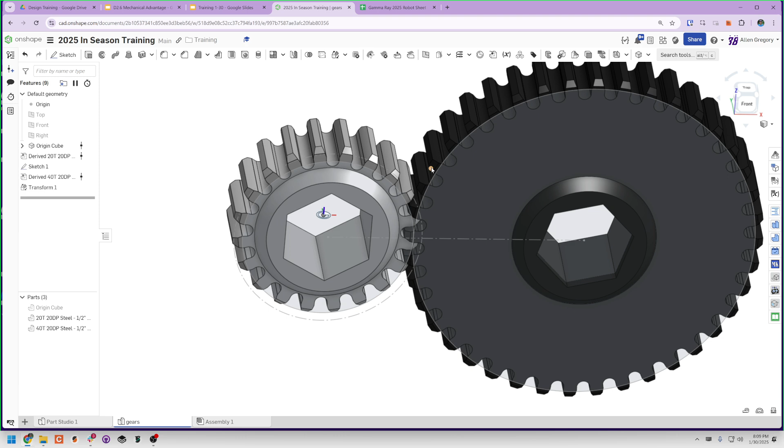COTS parts didn't exist for a long time, but at some point, the original kit chassis I think had metric gears, and then eventually they swapped over to 20 DP in one of those years, sometime in, I'm guessing, like 2006, 7, a long time ago. And then all of the gears sold in FRC for a while were just sold at this 20 DP size.

Every once in a while you'll see tinier teeth, so you'll see smaller teeth. Those are either some weird metric thing from a long time ago, or they're 32 DP. Those used to be really popular when we had really small motors, and we just needed to have a really small gear at the end of that motor and needed a little bit more teeth. And so we would use 32 DP gears to do that, but they were really easy to break, even in steel. You could break the teeth on those if you had them in any sort of heavy load application, so we don't use those.

And then the other ones we'll see sometimes are 10 DP gears, which basically the gear tooth at that point is twice as big as the ones for 20. And so the pitch is basically just how big the gear tooth is. And so for 10 DP, we use those on things that just need to be much larger. So last year we used it on the pivot.

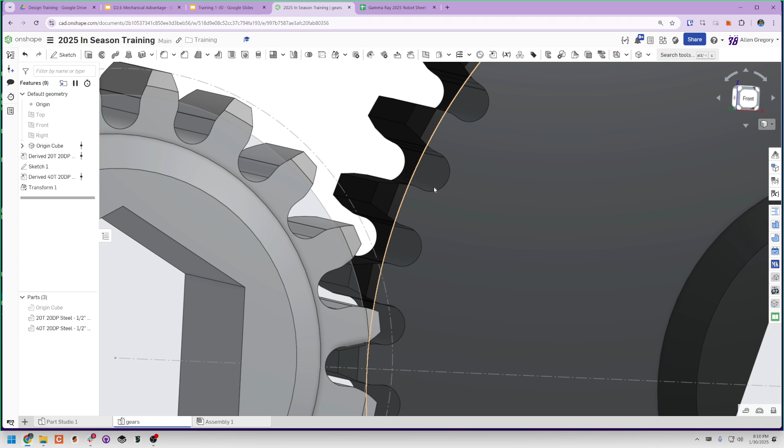So we can laser cut 10 DP. You can CNC route the gear teeth on 10 DP, whereas because of how tiny these gears are, it's really hard to cut these with a router because you can't really get the bit inside that groove. You'd have to have a really small bit. 10 DP makes that easier. The other reason we use 10 DP is for all of our 3D printed gears, just because the gear teeth are bigger and the plastic is harder to break. They have more material behind each one, and so that works really well.

So when we're talking about gear pitch, the equation is really simple for gears because it's a standard pitch that we're using. In our standard measurements, we can get the diameter that we need to do the gear distances and things without even really using a calculator, because all it is is teeth over pitch. So if you know how many teeth a gear has, you can divide it by the pitch, and then you can get the pitch diameter.

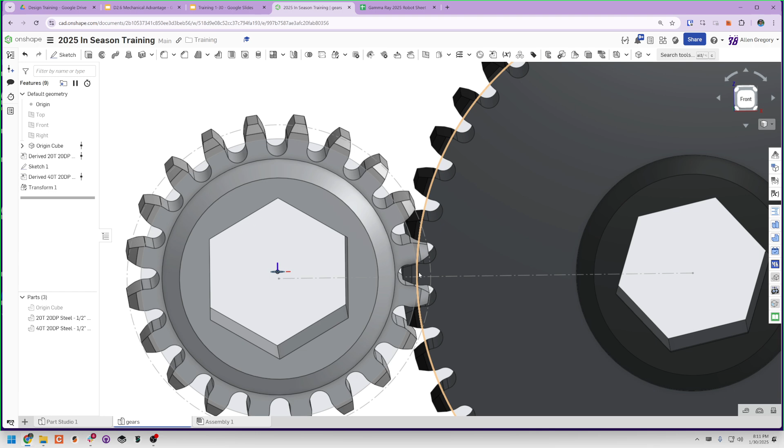And for gears, all you have to do is make sure those two pitch diameters are tangent, and you're good to run that gearbox. So we don't have to add anything. Sometimes people add a little bit of distance to make sure they mesh right. With modern FRC gears, you pretty much don't have to do that. Most of it works pretty okay right on. There were some people who would add like 0.003, 3 thou or something very small, to make it mesh a little bit looser, in case you didn't want it to touch as hard. Like this gear would be a little bit further away than this one.

So if we're looking at this sketch here, this is a 20 DP gear, and this is a 20 tooth gear. So it has a 1-inch pitch diameter. So that's our pitch diameter here, and that's what we care about in the sketch when we're going to actually mesh them together. That's what we care about for our distance between this gear and another gear, that these two circles line up.

So if we were meshing this to a 40 tooth gear, we'd have a 2-inch circle out here, and we'd make sure that those two circles are tangent to each other. And that gives us a center distance of 1.5 inches, because half of this gear's diameter and then half of this gear's diameter gives us our center distance. So it's relatively easy, especially in CAD, to build up some pretty complicated gear trains, because all you're really doing is connecting circles tangent to each other.

So if we wanted to have a second reduction out over here, we could have another gear, maybe the same size, another 20 tooth gear, we could make those equal to each other, and we could come out over here, make these two tangent, make these two equal, and now we know if we put our bearings in these 3 spots, we could have a 20 tooth connected to a 40 tooth. In front of or behind that, we could have another 20 tooth connected to a 40 tooth, and you could just keep going for as long as you wanted.

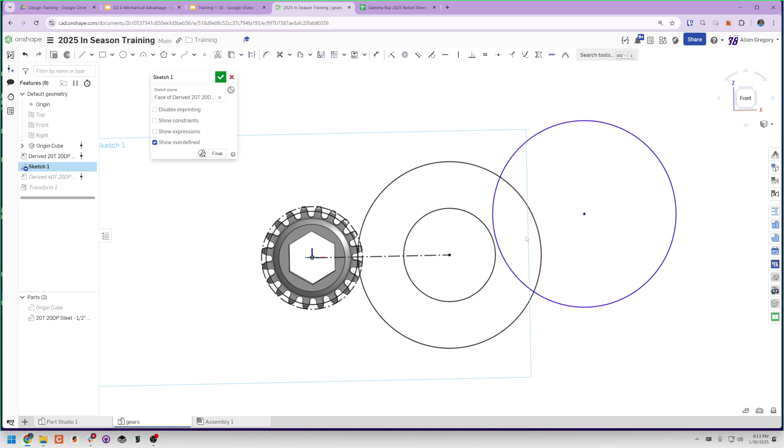Because it's just tangent, you can make them more compact by having the gearbox maybe up here somewhere. As long as it's not hitting this shaft or bearing, you could make it more compact and still have the output of the gearbox somewhere up here. So it just depends on how we're trying to package it all together. But all they really have to do is be tangent to each other.

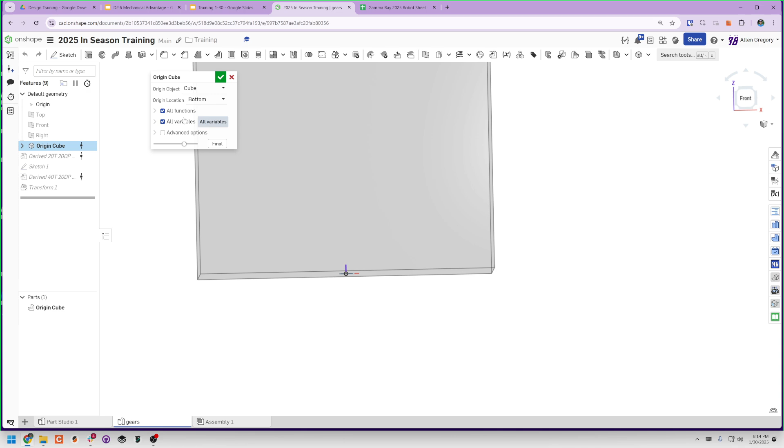Inside of the Origin Cube feature script, when we add the Origin Cube into our part studio, frcdesign.org added in the functions and variables, and with those we're able to get some nice little functions. Oh, it lost its mate connector in the transform. Oops. I'm not entirely sure why. Let me delete that. Okay, the gear's back.

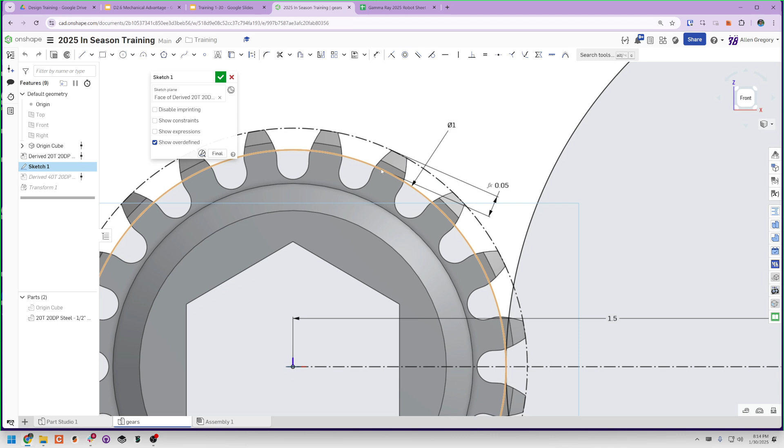Cool. Okay, so in this sketch, if you want to know the actual outside diameter of the gear, we're able to just have the pitch here, and then they have a variable where you can just type the pound sign, and it brings up the whole list of the different variables, so we don't have to go find a calculator or some reference to know any of this.

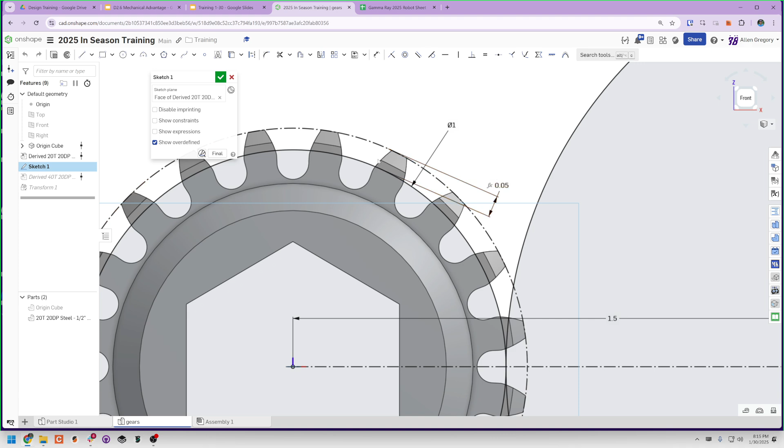And we can know that the offset from the pitch diameter to the true diameter of the gear, the OD, the outside diameter, is 0.05, so we can just click that in there, and now we have that outside diameter too. This is important if we want to make sure a shaft or another gear isn't hitting this. Depending on what we're doing, we want to make sure nothing's going to contact that. So when we're sketching, having the actual pitch diameter and the outside diameter is pretty helpful.

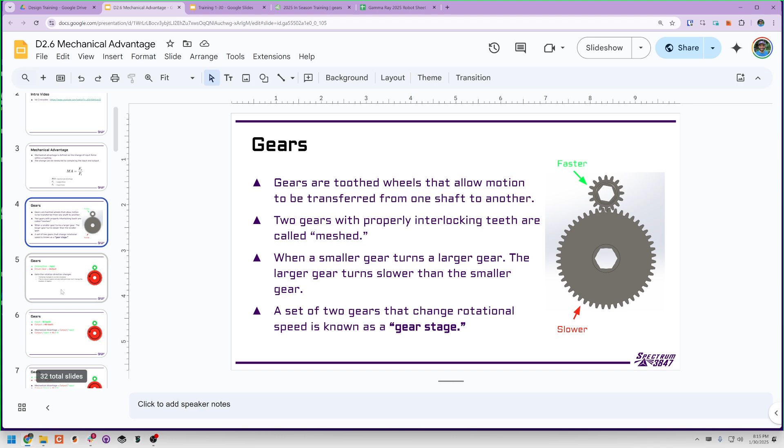We didn't talk too much about the ratios. There's a whole set of training slides and a video on the full mechanical advantage stuff, like why we have the gears and what we do with them. We're not going to cover all that tonight; it could be its own hour presentation. The basics of it is that it's just ratios.

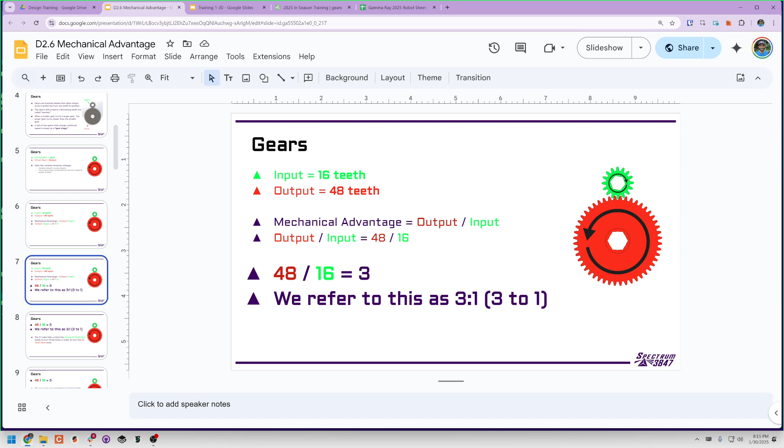We can divide the output over the input. So in this picture, it's 48 over 16 equals 3. In our example, it's 40 over 20 equals 2. And so this would be a 2-to-1 reduction, because for every 2 times that this 20-tooth gear spins, this 40-tooth gear spins once, because it's still only moving 1 gear tooth at a time as they're pushing against each other. And so we can just divide this size over this one to get our gear ratios.

And so this means this is spinning at half the speed of this shaft here. It also means that it's going to be spinning with double the torque. Torque, for most cases, you can just think of as rotational force. And so that's going to double our force.

So the motor is spinning super, super fast, and if we need to have that motor do something that requires a lot of energy and a lot of force, like climbing, for example, we're going to have a lot of reduction from the motor to the output so that we can use all of that torque in a very usable manner and actually do whatever task we're trying to do. We'll look at how we actually calculate some of those ratios in a little bit. But let's talk about belts quickly here for a second.

Okay, so belts are a little bit weird, mostly because most of the standards that timing belts use in the world are metric. There are some that are built on inch systems, but it's really not worth converting. Most of the timing belts that exist in standard industry are metric. Rev has a belt that is 1/4 inch pitch, and they have belts and pulleys for that. But they're the only company you can buy those belts and pulleys from, so it gets a little bit weird trying to find the exact belt length and things that you need.

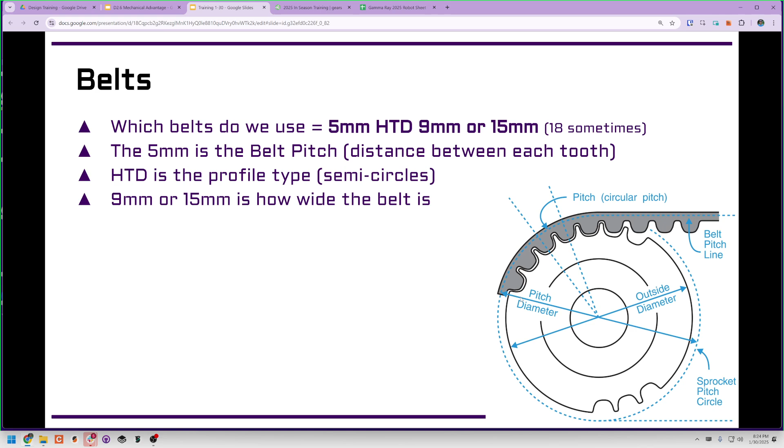And so that pitch diameter is what we're worried about when we're figuring out the center distance. But it gets a little bit more complicated with belts and pulleys because they're not just touching each other. You have to actually run a belt around both pulleys. So what we're trying to do is find our center to center distance, right? So the center between pulley 1 and the center of pulley 2 for some specific belt length that we want.

I didn't put this on the slides, but we'll talk about it for a bit. Belts are specified in 2 different ways. They also have to have the pitch and the belt type and the width. But then to actually say how big the belt is, you have to either say how many teeth the belt has, or you have to say its actual pitch circumference of the belt. So like how long the belt actually is going all the way around. Either of those numbers works. You can calculate pitch circumference from number of teeth as long as you know the pitch.

So that's totally fine. A lot of times we'll use belt teeth, a lot easier in our vocabulary when we're talking about things. We'll talk about a 60-tooth belt or a 65-tooth belt, which works well for most FRC applications, and a lot of the FRC vendors sell them that way. Most of the industry, if you're trying to buy from a non-specific robot supplier, they're going to do it on the circumference of the belt and not on the teeth. So you actually have to do the math to figure out the teeth versus circumference, to make sure you're getting the belt that you actually want.

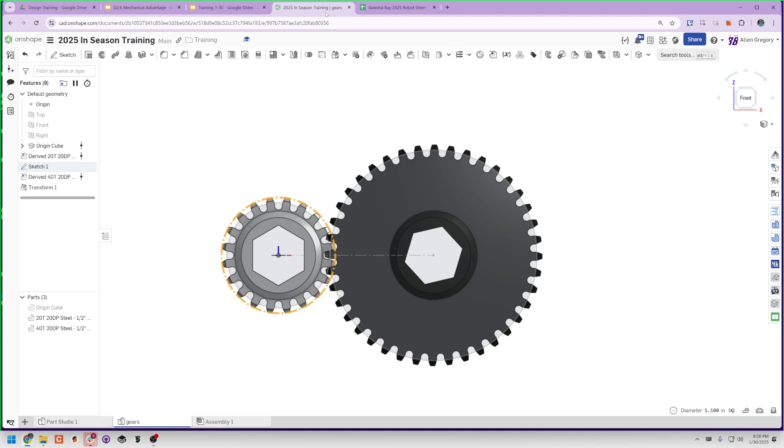So for a specific pulley, the nice thing that we have now is we can do it built in to Onshape. Actually, let's do it on Recalc first, because we can look at all the numbers a little quicker. So Recalc is a nice website built by Justin Tervay. He's up in New England, and so he does most of the code for this.

But it's basically just designed to be a nice web calculator for a lot of the different things you might need to do on a FRC robot. There's a bunch of little information and stuff down here. It's just a nice site to go and learn. But a lot of times we're using the belt calculator or the linear mechanism calculator or arm calculator, and those are kind of how we can pick our gear ratios and things. And then also for belts, just getting our distances right.

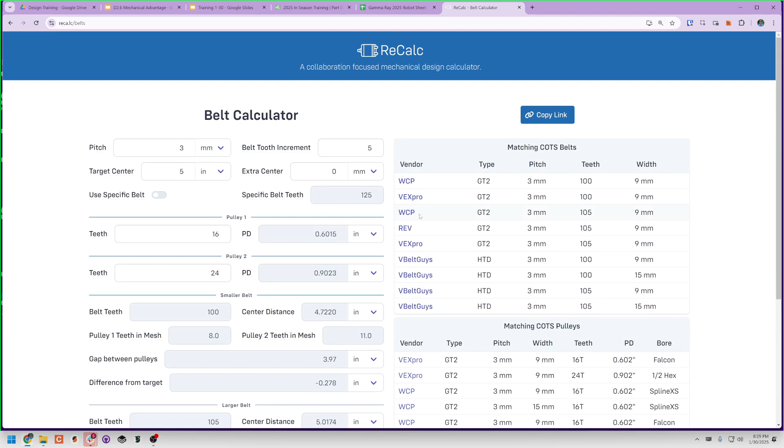So with the belt calculator, it does look a little intimidating. There's a lot of numbers. With all of Recalc, any of the gray boxes you're not typing in. That's just going to be stuff it gives you as output. So you're only filling in the white boxes. Everything over here is just links to help you buy the belts you need, or the pulleys you need. So for most of our stuff, the first thing we do when we open the belt calculator is we swap this pitch to 5. And so it's 5 millimeter.

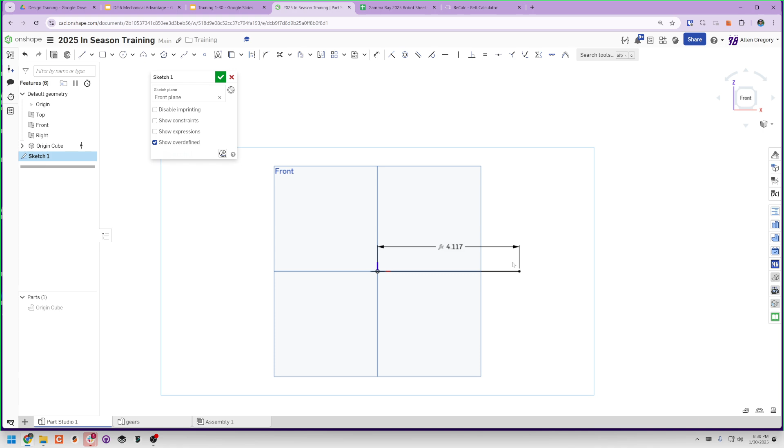And then a lot of times we'll have some mechanism that we're trying to build. Like if we have a motor here and we're trying to run a roller over here, we would need to know, okay, this is about 4 inches that we're trying to get this to be. So we'll sketch it sometimes with whatever units we need to make it kind of look right. And then we'll come into the calculator and we can tell it, okay, we want it to be about 4 inches. We don't need any extra center distance or anything, and we don't know what belt we want yet.

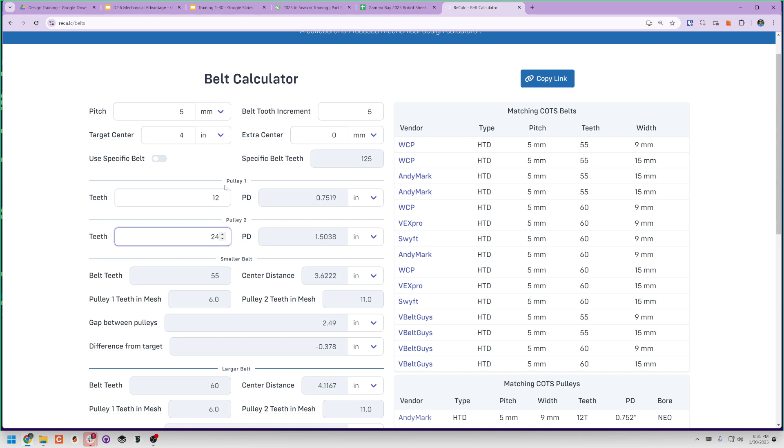We know that the motor is going to have like a 12-tooth pulley. We can say the roller is going to have a 24-tooth pulley. And if we do that, we can see our options are either a 55-tooth belt with a 3.6222 center distance, or we can run a 60-tooth belt with a 4.1167 center distance. You can tell it different tooth increments. For the most part, 5 is pretty good.

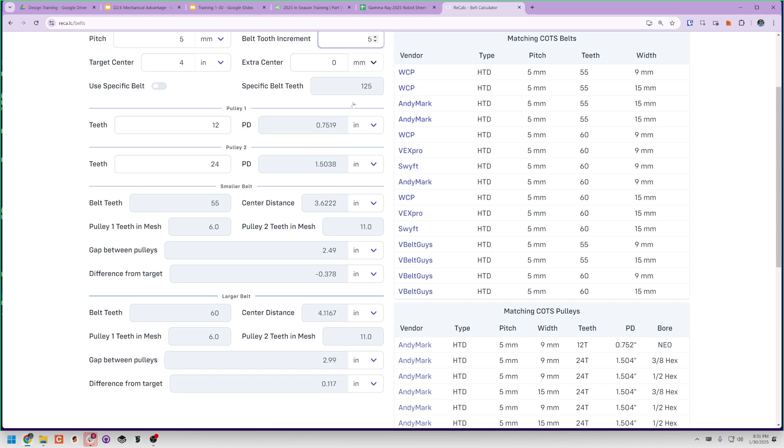For 5 teeth increments and a 5 millimeter pitch, that means we're changing 25 millimeters of our belt circumference each time, which is about an inch. And that ends up working out pretty well. We're able to stock all of the lengths pretty nicely. So in here, the 60 tooth belt times 5 is a 300, I believe, right? So if we come down here and we look at that 60 tooth at V-Belt Guys, this is one of the places that we've found that we really like to buy belts from.

And so this is a 300 long belt, so that means it's 300 millimeters in circumference. It's 5M, so it's 5 millimeter pitch, HTD in this case. We know that that's true because that's just how they spec it. And then the 09 is for 9 millimeters wide. And so you don't always have to know this. Sometimes I'll have to go in here and search for something if I'm not sure they sell it. But you can also just do it on Recalc and it'll give you the links because he built it all to be able to link specifically to these different vendors.

And so we can buy whatever belts we need. And like I said, a lot of these belts are super cheap. This is a $2.60 belt. That's why we can stock whatever, 15 of them over in the closet and not worry about it.

Okay, the other way to do this, if we don't want to use Recalc and we just want to do it directly in Onshape, is because of that origin cube functions that we have, we can go ahead and just type it into here. So if we start typing belt, we can choose belt 5 millimeter. We can tell it our belt teeth, I believe is what it takes. So we can type in like 60.

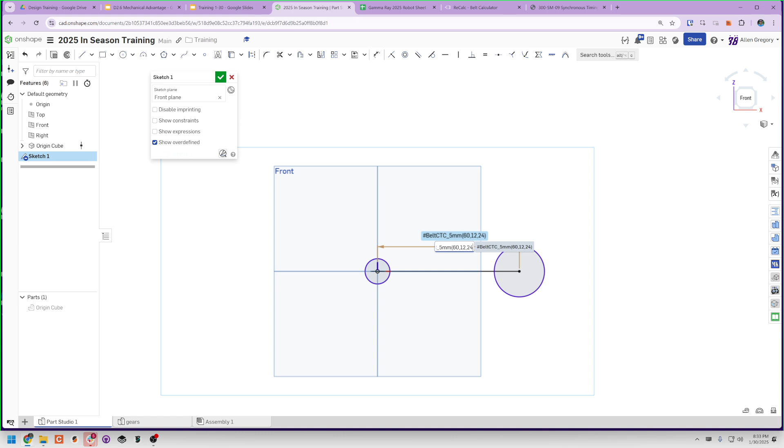Then we can type in one of the first pulley diameters. So in this case, we're gonna have a 12 over here. And then we can type in 24. And then if we hit enter, it gives us that 4.117, which is basically the same thing that Recalc gave us as well.

And so that makes it really fast and easy to do some belt calculations. If we're not sure what we're going into, you can go in and be like, okay, maybe I want it 65. Or you can just literally be typing in and finding the value here without ever having to actually go to some other calculator. You could just find a belt that works.

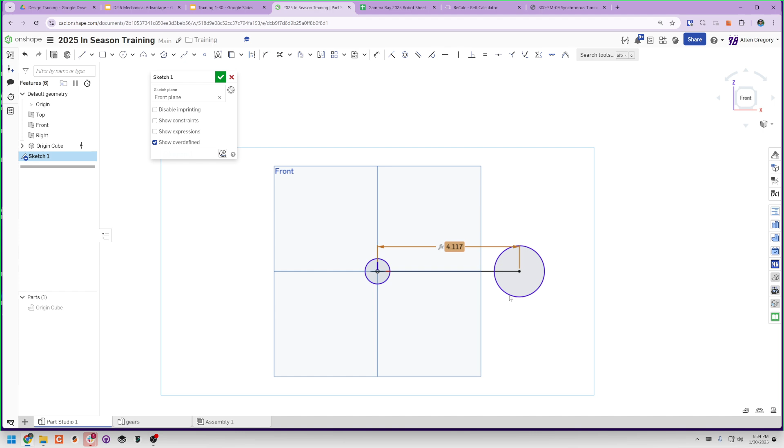This also works well if you're just trying to find one that we already have in our closet, and just figuring out where you might have to put the motor to get the roller to work the way we want. Yeah, and then I don't remember if this had pulleys. Yeah, so it does. It has pitch diameters for pulleys too, so you can come in here and just say, okay, it's a 5 millimeter, this one's gonna be the 24.

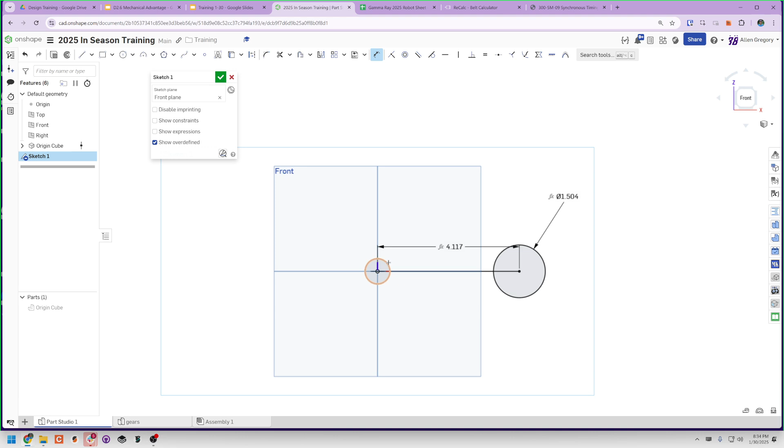And so it'll give me the pitch diameter for that pulley, and I can do the same thing here as well and make that 12. And so now I have the pitch diameters of both those pulleys on a 60 tooth belt distance, and this is pretty close to exactly what we would actually want on our robot.

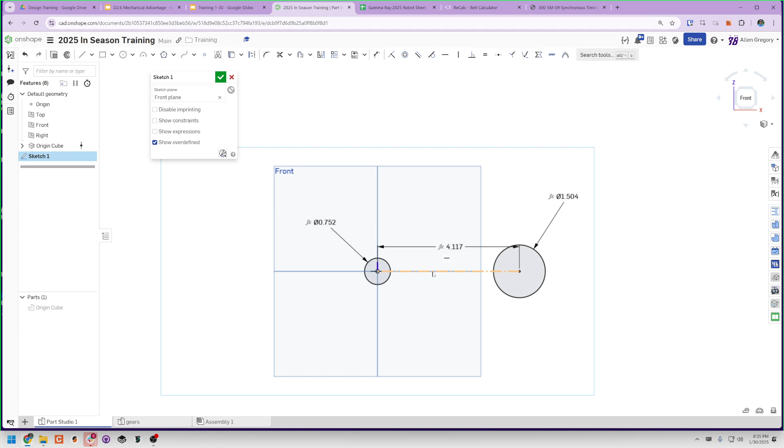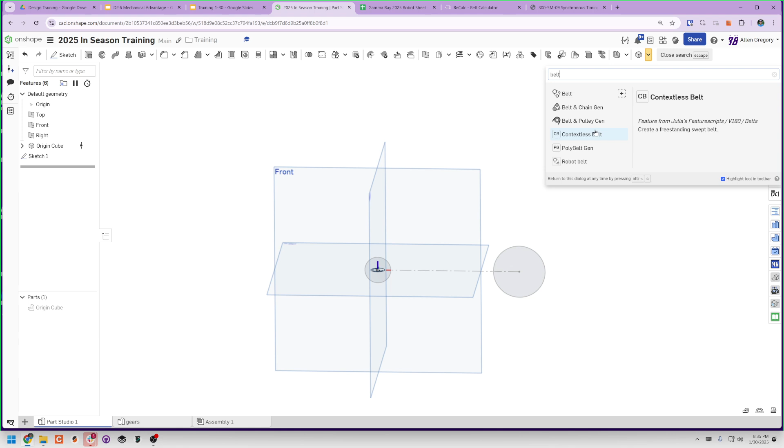For CAD, the other thing that we were able to do is we can insert the pulleys in the assembly the normal way, or we can create them if we're CADing them, building them into something, and we're going to print them. Then we can also generate the belt. So there's a few different feature scripts for it. Contextless belt works pretty well. It's one of Julia's. She did a ton of really good feature scripts for FRC. And so this is the normal one we use if we're just trying to get a quick belt.

And so we can basically tell it, okay, we want our 12 tooth pulley at the front. We want our 24 tooth pulley on the other side. And then we can do it in place. So we can tell it, okay, I just want to go from this point to this point, and it'll make our belt for us. We can also tell it the width of the belt. So say maybe we only want it to be 9 millimeter.

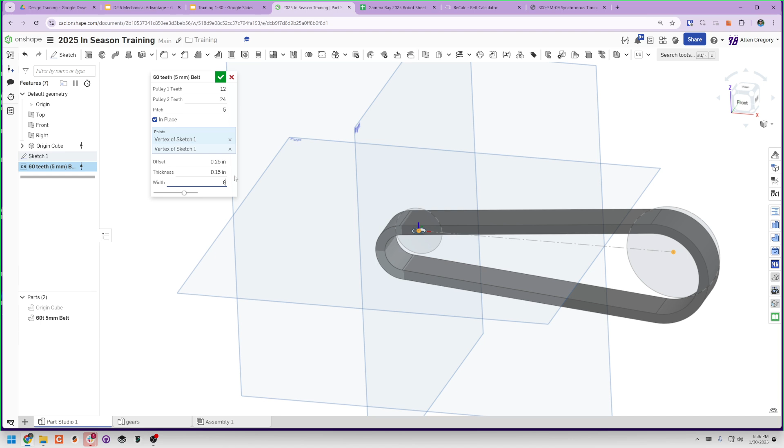It knows that it's already 5 millimeter pitch. We don't necessarily have to have an offset. We can get rid of that. And then you can set the belt thickness as well if we calculate that differently somehow. We can decide how we want to calculate that. Most of the time, this is pretty close. And so this belt lets us have a nice, simple belt that doesn't take a lot of time to load.

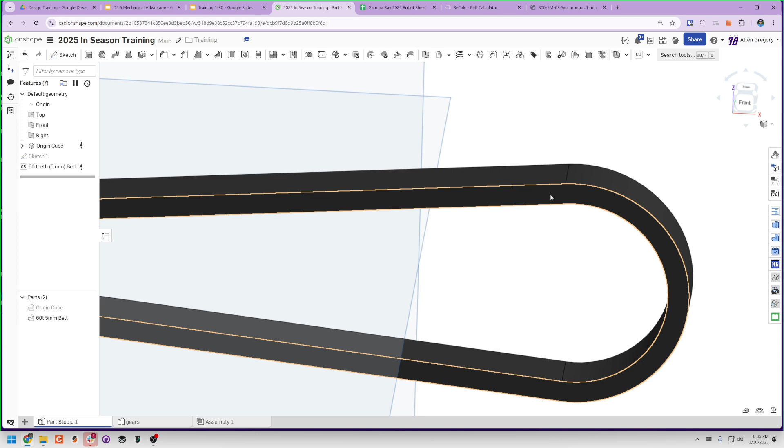We're not trying to have each of the teeth actually in there. There are other feature scripts that'll do that. If we actually want all of the teeth for some reason, we could do it. But for the most part in our CAD, this is all we care about. This lets us see if the belt's going to run into anything, or if the belt path looks clean and good. And like I said, there are several others that you can go through and make much more complicated belts if we need to, that are totally doable and work well.

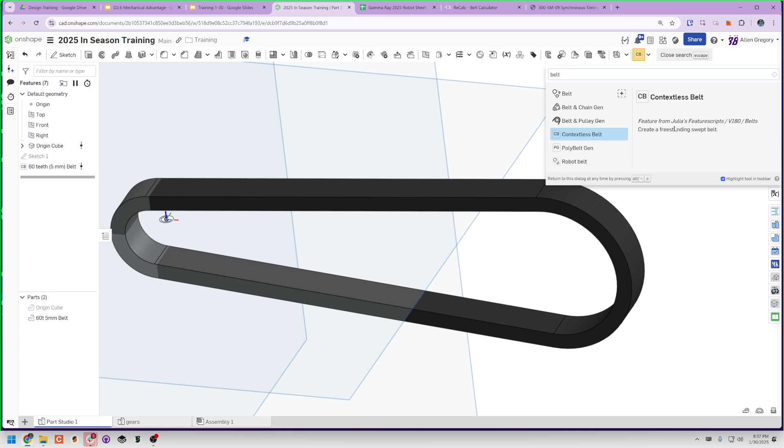For the most part, this one is just fast and lightweight and simple and lets us make the belts pretty easily. And then if you do them in place in the part studio, they insert nicely into the assembly, right where they're supposed to be. Sometimes if you have to do them in a different part studio or something, you'll have to rotate them when you go to mate them, which can be a little weird if you don't get the angles right.

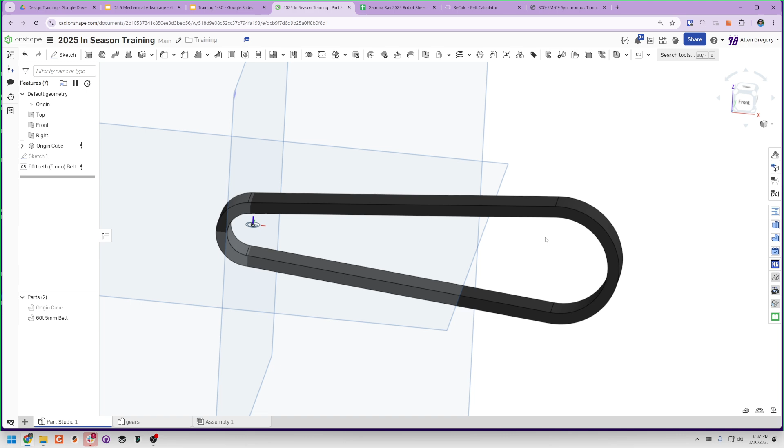But as long as they're close, they're pretty good for our CAD. We're not super worried if this is not exactly concentric to the other pulley. As long as it looks about right, we're pretty happy. Okay, any questions on gear distances or what we use for belts or how the formulas work or anything like that?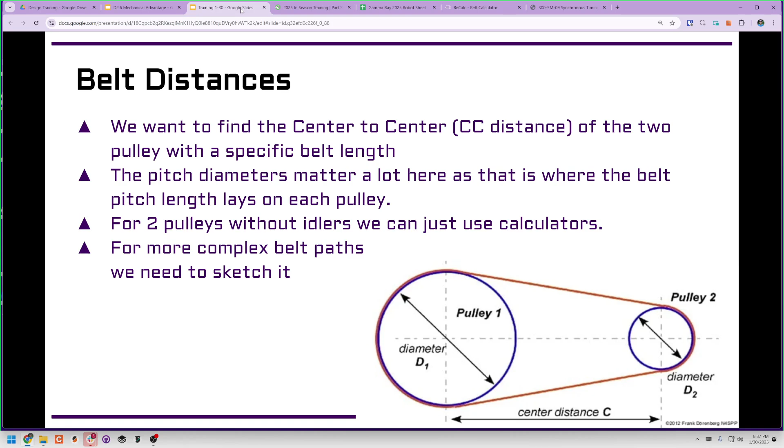Okay. Let's talk about, I'm going to do like, how much time do we have? I'm going to do like 10 minutes on our gear ratio stuff. So,

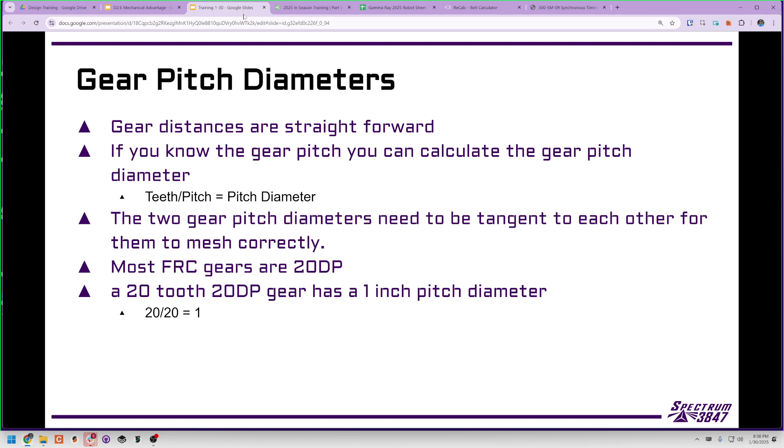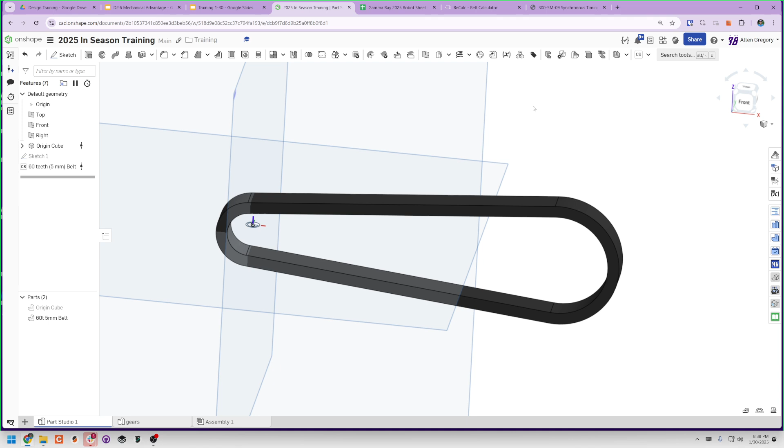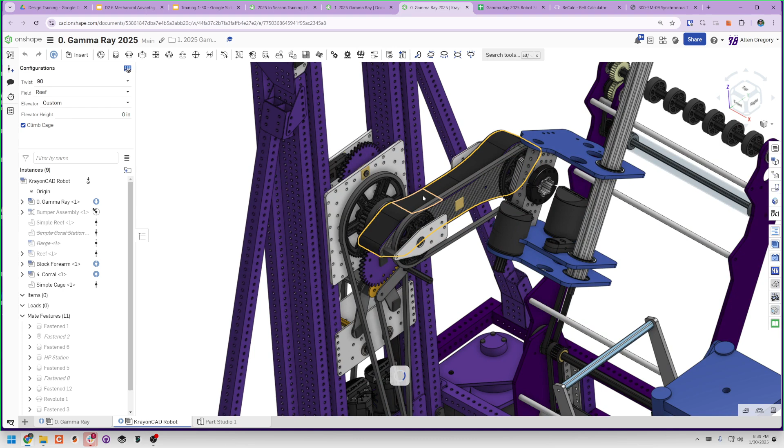for most of the robot, we can kind of divide things into either high speed applications or high torque applications. There's some times where there's like a mixture of both that we need. But largely you're kind of in those two areas for the most part. So like we can imagine on this robot that we are currently designing, the rollers are going to be very high speed applications. We want those spinning very fast. The arms, elevator, climber, all of those are going to be relatively high torque applications. We don't actually want these spinning very fast in terms of revolutions, right?

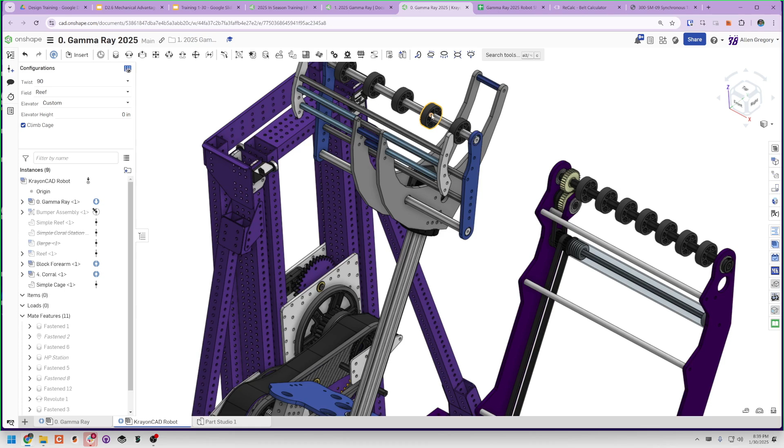It would be very bad if our shoulder started spinning at 2,000 RPM. That would be very, very bad. That would break lots of things. We do not want that. However, if our coral roller was spinning at 2,000 RPM, that might be fine. We want these wheels spinning very, very fast. And so that helps us actually intake the coral, and they don't have to exert a ton of force on anything. They're not trying to lift anything. They just need to be able to suck in the coral, and as long as they can do that, that's all we care about.

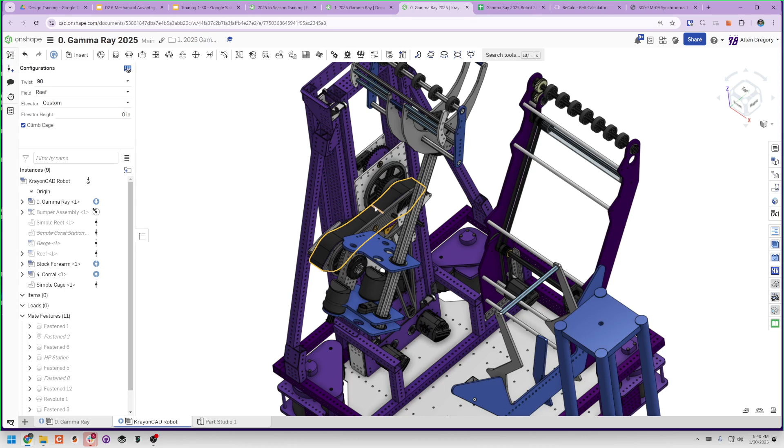So when we're looking at gear ratios, some of it's a little fuzzy. We don't often go through and try to fully optimize every single one just because it takes some amount of time. And for the most part, as long as we're in the ballpark, the motors that we're using now and the software control and things that we have allow us to basically, if we're close, the performance difference for optimizing even more isn't really there for the amount of time it takes and for how much we have to know ahead of time to be able to even do that.

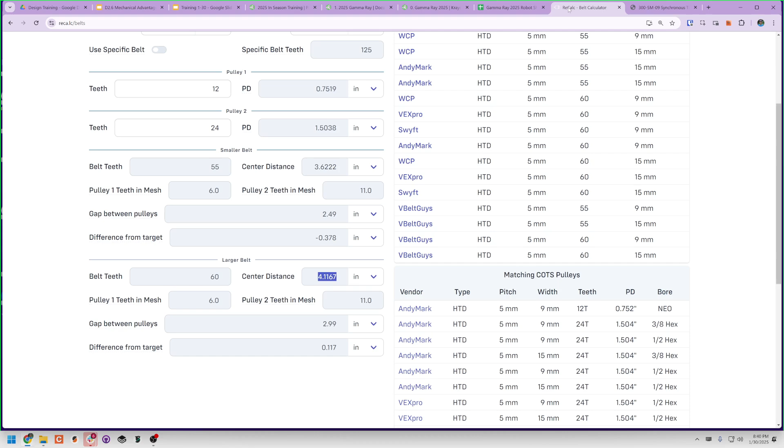So for some of it, we'll do things like in here where we have the MAXPlanetaries. We planned for 2 stages here with, I believe that's 14 to 72 up on the arm. And so if we can do that calculation real fast, we can go over to ReCalc. I don't know if it actually does. It'll only let you type the ratio. So when we're typing the ratios up, we can just use like Google or whatever to figure out the math. But 72 over 14 is about 5 to 1. So we're getting a 5 to 1 reduction from the chain on this end.

If we have 2 MAXPlanetary slices here, any one of the slices can be anywhere from a 3, a 4, a 5, or a 9. And so we basically just multiply all of those numbers together. So we could do a 3, 3, and a 5. And so that would be 3 times 3 times 5, and it's roughly 45 to 1. If we make one of these other ones a 5, we can get up to 75 to 1. If we wanted to get really crazy, we could do like 9. We can do like 225 to 1. So we have a lot of room to play if we need to.

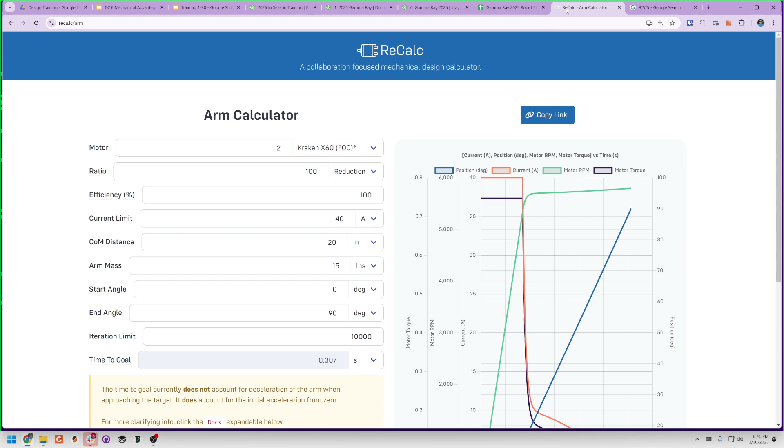For the arm calculator here, if we have two Krakens powering it, and let's say like that 75 number is real, that's probably pretty close. That's a rough guess of where we might be. If our arm mass is like, let's say it's even a heavy, because we can err on the side of heavy here. We can give it a little bit more current if we need to.

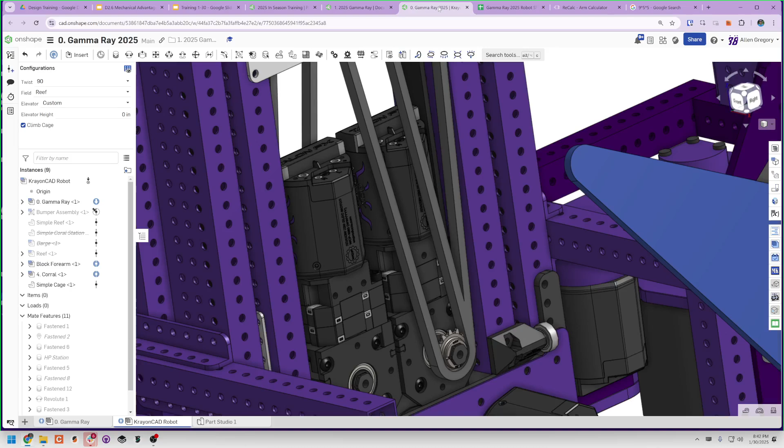And our center of mass distance is probably not actually 20, it's probably closer to like 10 for the shoulder joint. So if we look at the shoulder, it's moving most of its mass out here, which is going to be a little over 10 when it's this way, a little more plus the actual length out there. So it's very likely the shoulder will be geared higher than the elbow since it's moving more mass. So you might want to move that up. We could do, instead of 3-5-5, maybe we do 4-5-5. We go all the way to 100.

And for our center of mass distance, we can err pretty far. We can say it's all the way at 20. I don't think it will be. It's definitely not going to be 20 pounds. But even if it was, in this case, if we had a 100 to 1 gear reduction and it was 20 pounds, we could move the arm 90 degrees in half a second, according to this calculator.

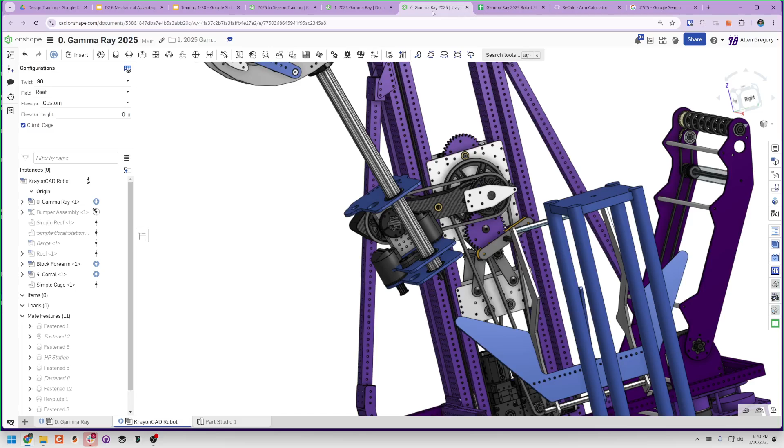That's a lot of times about what our goal is for a lot of our movements, to make sure we can do it in half a second. 180 would be all the way from full down to full up in a little over half a second, which would still work if we needed it to. And these are very gross overestimates of how much the arm will actually weigh and how far away we think the actual center of mass would be for the most part.

But even if these were accurate, or if they're a little bit off the other way, we could then go and change our reduction and still get a little bit faster or slower if we need to. So if we decided, oh wait, no, we actually wanted a little bit more reduction, we wanted to be at like 125, we could, and we could see that actually doesn't change that much for our speed there. So that's still like 640, so that means we're probably over geared here.

So if we drop this down, if we try to get somewhere like an 80, that's pretty close. Okay, so somewhere in there is about right, because as you go up, it'll start getting slower, it'll start getting faster, and you can find about where this balances out. And that's normally pretty close to what our estimate is going to be. We can make these estimates a little bit closer to real life as we know more, like exactly how much the arm's going to weigh, or whatever the motion of the robot is going to do. We'll get these a little bit closer and make sure we're about right.

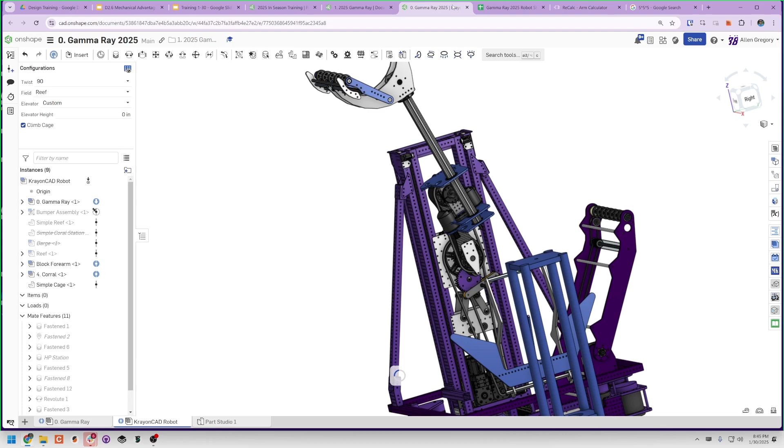So we did this when we were calculating the wrist, for example. In this gearbox, this is all fake right now, but there will be gears here, and we were looking at, okay, how much gear reduction do we think we actually need? We did a little bit more approximation: we know the coral is going to be sitting like 6.5 inches out here. So if we put all of that at 6.5, what does that look like if we have 10 pounds out at that number? How much force does it take to rotate it? How fast can we spin the wrist?

And I think when we did it for what we're doing, we could do a full 360 in somewhere around half a second or like 0.6 seconds, and we should never need to do a full 360 with the wrist. But it should be plenty fast for what we're doing at a pretty moderate, I think somewhere around 20 to 1 if I remember correctly. We have it all documented somewhere. But something like that gets us in the ballpark of where we want to be for the mechanisms.

And then for the worst case, for a lot of these, we know if we have to, we can swap them or change them to actually improve as well if we need to later on. But we try to get it pretty close to accurate, or where we at least think the system will work when we're building it the first time.

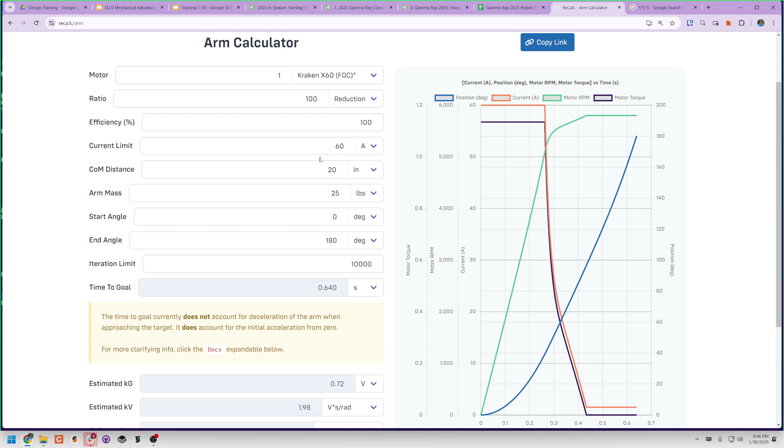Okay, let's talk about the part sheet. So this document, Gamma Ray 2025 robot sheet, lets us basically have somewhat of a standard naming system, but more importantly, it lets us actually see all of the stuff that we have to make. So this sheet gets very long. There are a lot of parts. This is every part, so there's lots of little shafts.

A big chunk of the robot is the elevator and the shoulder joint and everything. So that's why there's like 75 parts here. A big amount of the robot ends up being this part of the robot. And so they've gone through and we kind of know what all these parts are. They have names, and it works out. Most of the other subsystems haven't finalized what's actually going on the robot.

Drivetrain has, and it needs to get its parts in here and renamed in Onshape so that we can track them correctly. But most everything else doesn't have this fully set up yet because we don't know exactly that those parts are actually going to go on the robot. A lot of them are still just kind of sketch-ups and test versions, and then we'll go back in and rename everything, give it part numbers, basically when we're ready to actually manufacture.

So a lot of these will get changed here shortly to ready for manufacture, and so we can swap down and see how we're ready to do things, or like design and review, so we can go and check. Some of these we don't use all that much about certain parts of the robot. A lot of times these will be communicated through Slack and things, so we don't always use these boxes. But the main thing we want to communicate is whether we're ready to actually build it.

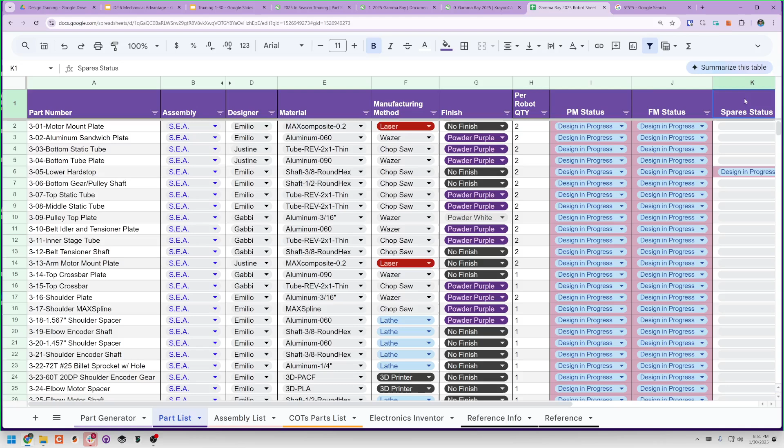So yeah, when the mechanism groups are ready to make a part, you can go in and basically choose which assembly you have. You can name it, kind of describe what that part is going to do. Middle corral plate, whatever it is. You can choose who designed it. You can choose what material it's going to be made out of. If something's not on here, let us know.

We can add things. You can choose how it's going to be made, if it's going to be finished, how many per robot. And then when you're finished, it gives you a part name here. So I'll normally Control-C this, click Add to Part, and then go rename it in Onshape with this name. And then once you click here, it'll run the script, and that'll get added down in here. So it gets added to the list, and it gets the next number ready for this assembly.

So this works very well for us. I'm going to go ahead and delete that so it's not actually on the part list until one of the people in Corral actually does it. But this is kind of the way that we want every part of the robot. So anything that has to get manufactured, right? We don't do it for every single bolt unless the bolt has to get modified in some way. But any custom part that goes on the robot, if it has to be cut to length, laser cut, water jet, tapped, drilled, whatever, should have a part number and part name.

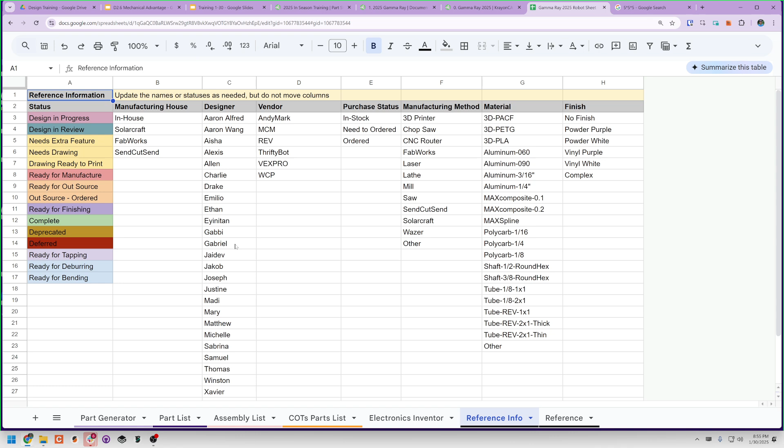Most of the other stuff is just here to do a little bit of referencing. We'll do inventory at some point, make sure we have stuff. This is where we can add names. If we have more people designing, we can add names in here. COTS parts, if there's specific things we need in the assembly, getting inventories for your subsystem is very useful. So if there's some part that you know you're going to need quantity of, especially if we start having wear items, something we know is going to be swapped regularly all season,

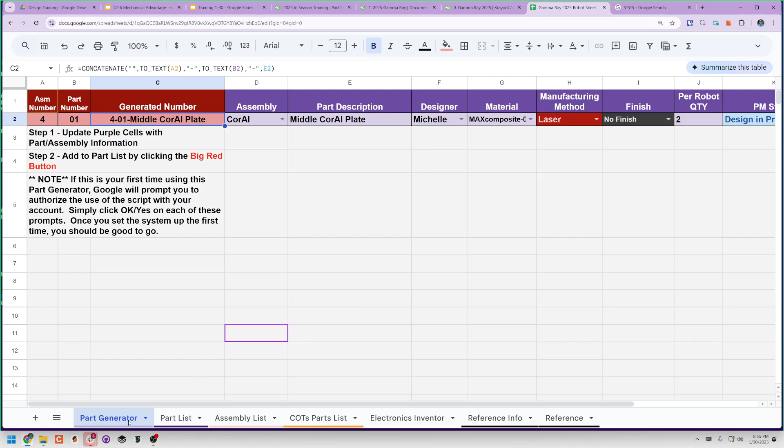whatever it is where it might have to be regularly maintained and swapped in, knowing how many we have all the time is very helpful. We do some of this in the purchase channel in Slack, but otherwise it's just making sure that we have what we need to actually build the robots, have spares, and be able to compete at a high level. Okay, I think that's most of it. All right, I think that's all I have.